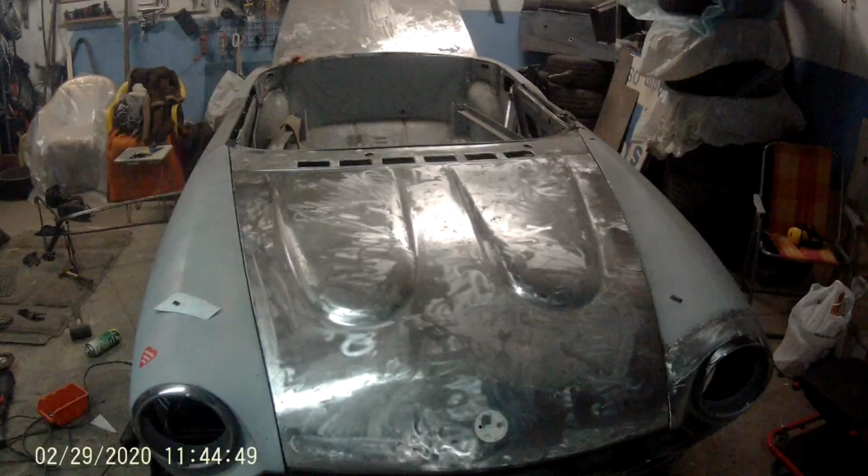Okay, we have here a 1979 Fiat Spider. The bodywork is almost done, not much left to work on. However, I am receiving a lot of questions: how can I form and profile the metal? So we will try to show it. How can it be done in an amateur garage without all the fancy professional tools and machines? So let's get started.

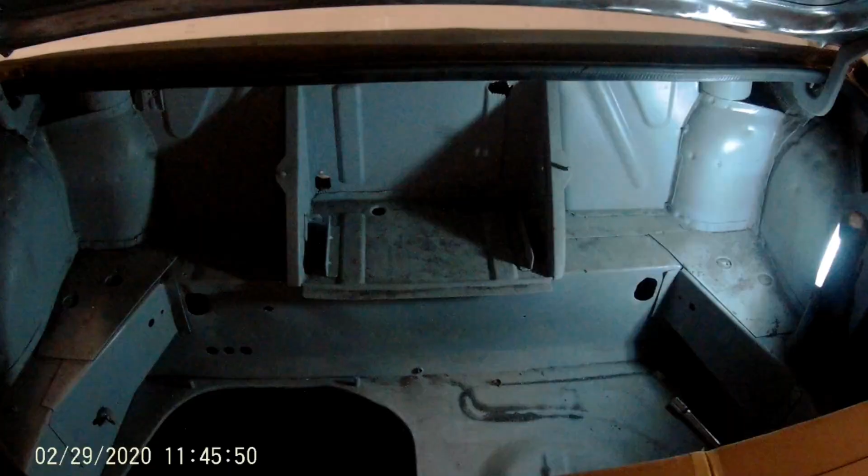So right now we're in the trunk of the Fiat, where the battery is located in the 1979 model. In previous editions it was located in the engine bay. However, in this bad boy we've got a battery in the trunk. Time and tide, time and rust wait for no Fiat, and the acid environment doesn't help at all. So usually the battery box areas are pretty heavily rusted, and the same story goes in here. We will try to fix it.

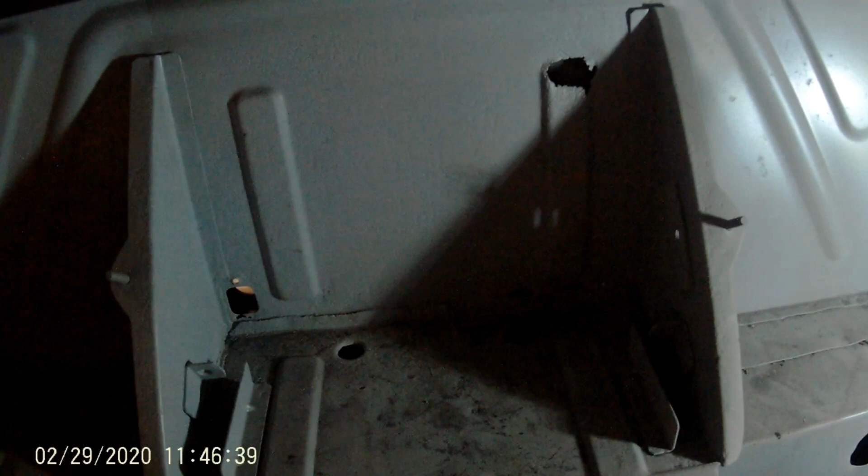Of course I could fix all those holes piece by piece, but in this case I believe it will be better to manufacture the entire battery box from the beginning. It is a pretty easy piece of metal. However, we will focus not only on the walls and the battery tray, we will try to fabricate all those profiles as well. So let's start.

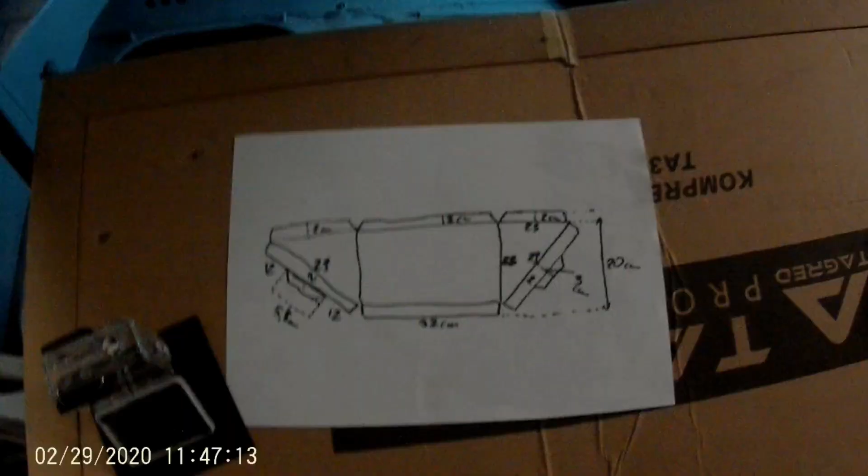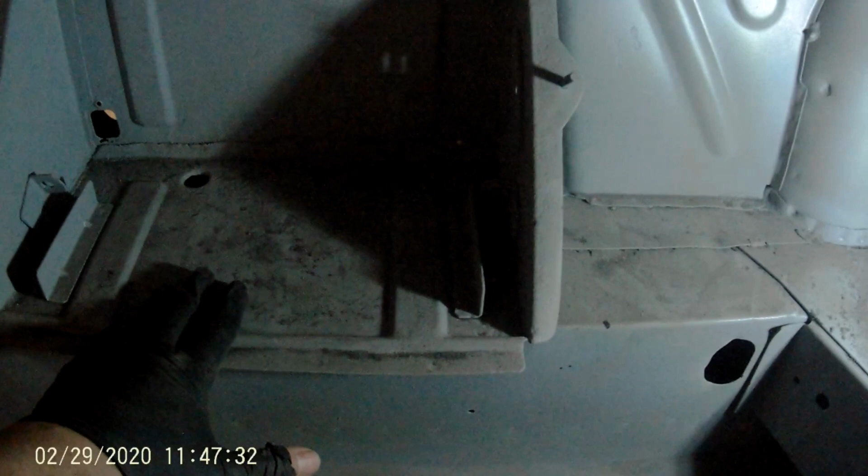Okay, first things first, we need to start from measurements, and I already made some basic drawing that shows all the necessary dimensions. As you can see, there is a battery tray. There are naturally walls, but the battery tray has got all those lips. The walls have all those lips as well. There's also another profile in here that stands for the wall, and an extra profile for the bolts. And they need to be located in exactly the same position, as there is another plastic cover that fills in the battery box, so they need to fit perfectly.

In the beginning we will focus only on the shape, and on the second drawing I will try to measure all those profiles. However, first things first, let's start from the raw piece of metal and the basic drawings. Okay, so all the measurements are done. We've got the basic drawing on the metal plate, and we will start cutting. I'm using a simple angle grinder to cut that. I don't have any special tools.

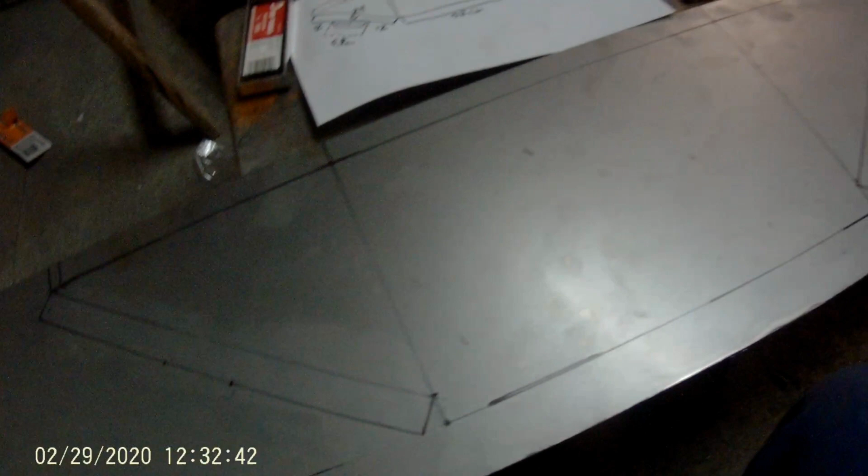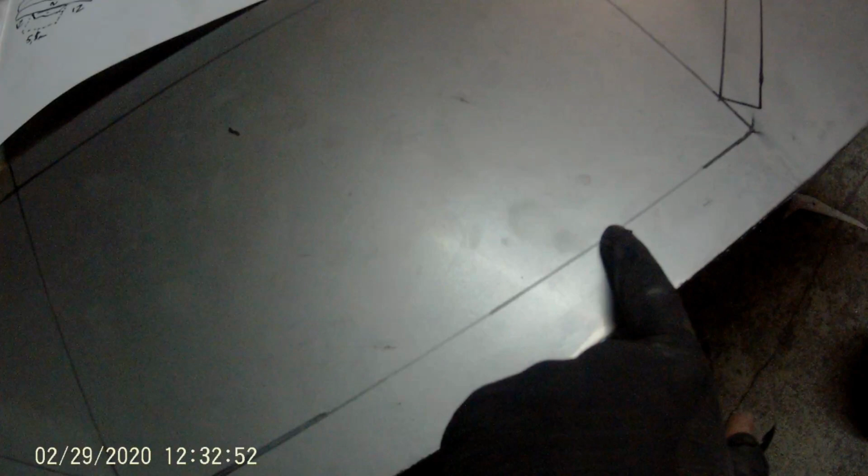I know that there are many disadvantages of using an angle grinder, as there are some sharp edges, and metal can be overheated, so the corrosion might be a little bit quicker. But after that we can do a final touch to the edges that we will cut, and it will be quite okay. I didn't make a movie how to put it on the sheet, as I think this is pretty much easy.

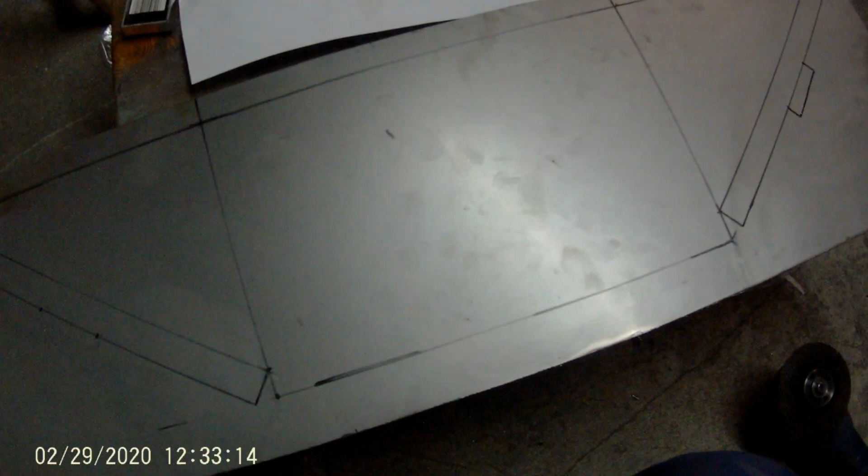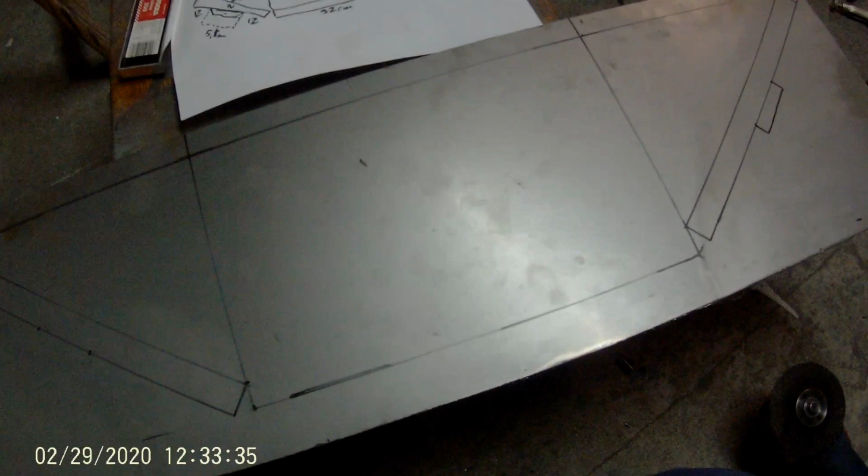A little bit more about the metal. This is 1 millimeter thickness metal sheet, cold rolled, ordinary piece of metal, nothing fancy. I believe it is easily available in all the hardware stores, metal shops, and so on. So nothing special. Okay, we'll start grinding.

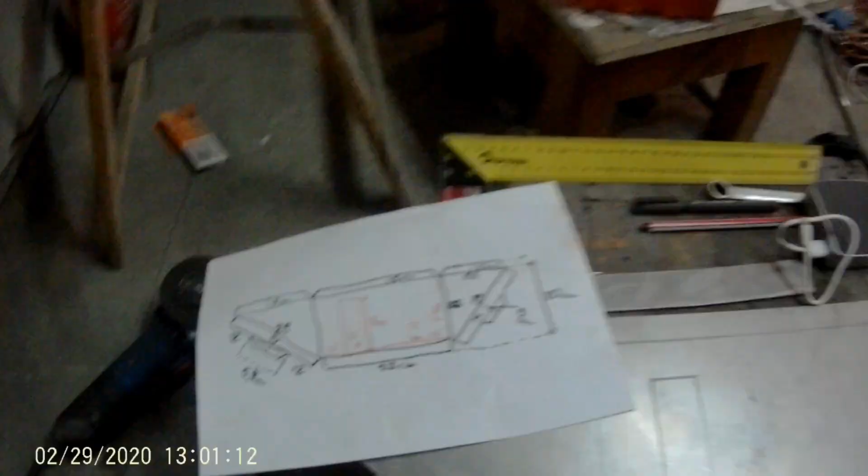As you can see, we still need to work on the edges, something like that, just to make them in exact shape as they are in the original piece. But in general, we need to cut in here, we need to cut in here, and yeah, that's pretty much it. Stay tuned.

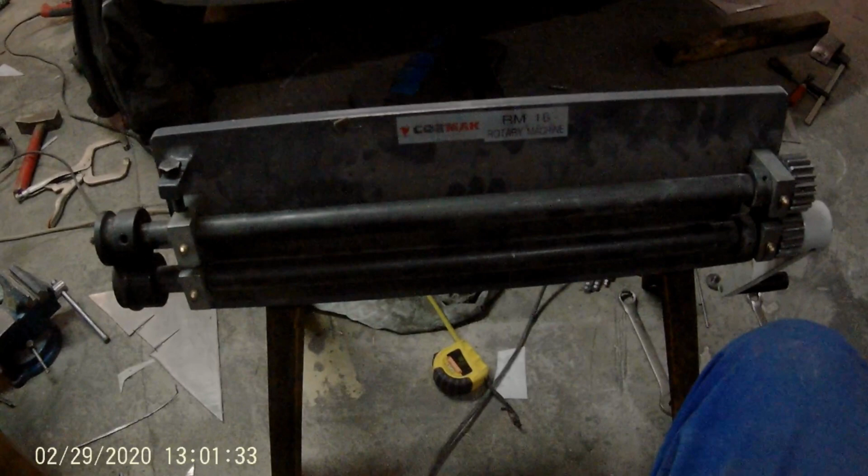Okay, I have added some colors to our life and to our drawing just to make sure that I will not mix some lines with the previous ones. I already put that on our metal sheet, and right now we will use a machine, a simple one that is making nice things with metal.

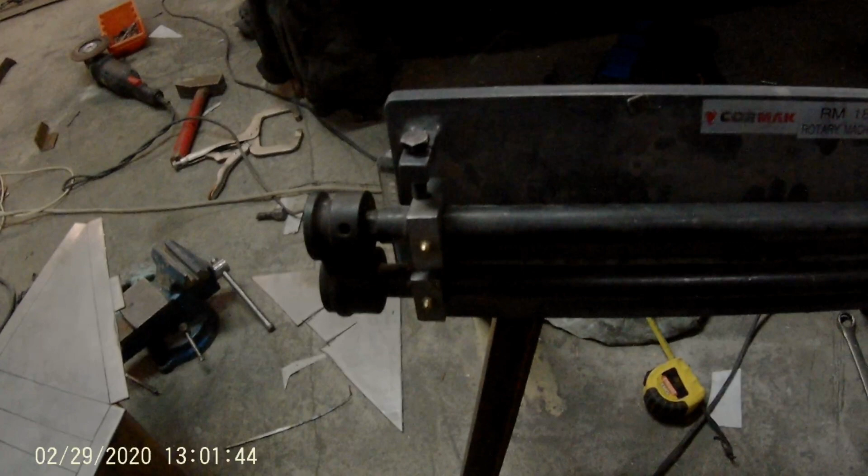Okay, we said that there will be no fancy machines, but as a matter of fact, that kind of machine is less than $200. So whenever you wish to do a little bit more with the bodywork, I believe it's kind of a must-have, and less than $200 is a decent price for having some fun with the metal. You will get those pieces, and they are adjustable, a lot of dies with different patterns, so you could do a lot of nice stuff.

I already put a round one, and before we make a first pattern that goes right here, I will do some trial with scrap metal, just to make sure that the profile will be exactly as we wish it to be. So let's have a start.

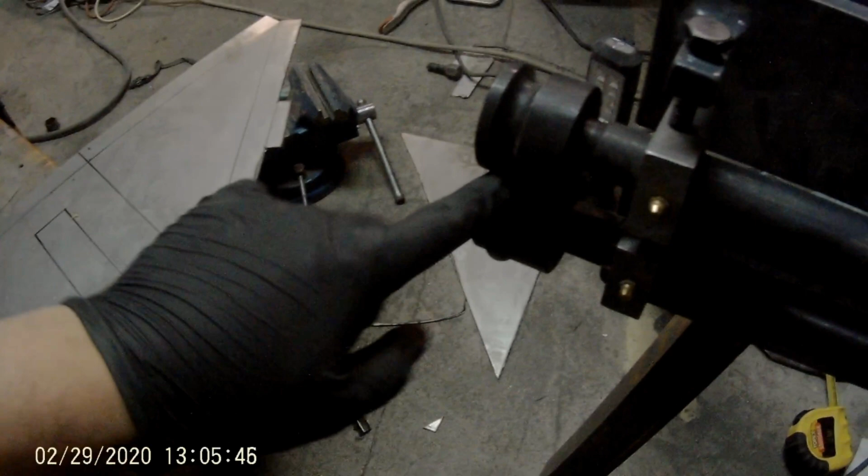Okay, so right now we will put that piece of metal in the machine, and we will go all the way just to make that pattern, and then we will think how to make these. I do have some ideas, but I will need to check that before I ruin an already cut piece of metal. Let's have a see.

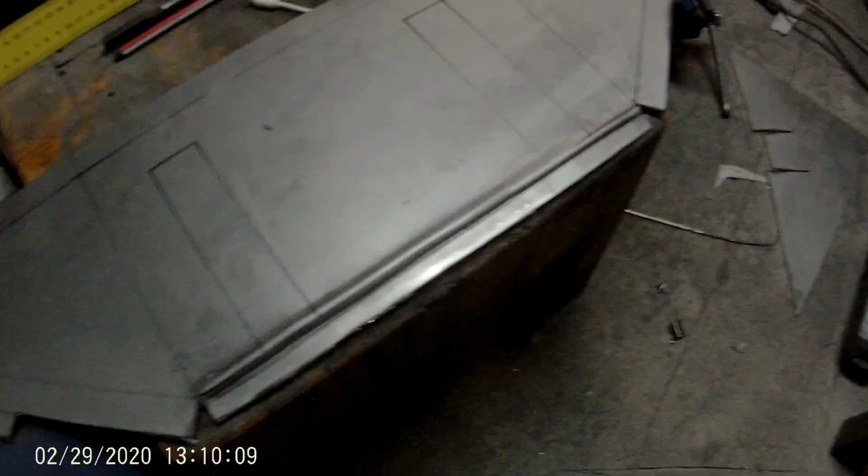Okay, the first profile is almost done. As you can see, the machine does not solve all the issues. There are a lot of places that need to be fixed using a hammer. As you can see, the profile of the metal is also a little bit bent, so we will use the hammer just to make it even. Right now I need to think of an idea how to make that piece also up. Let's see.

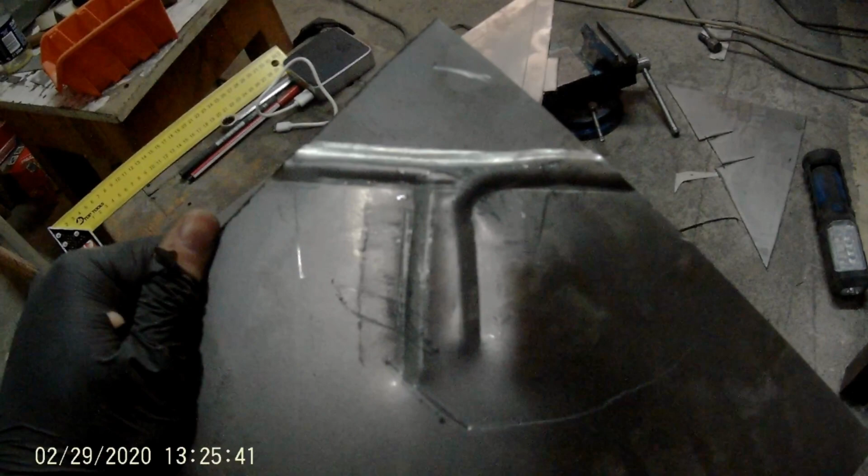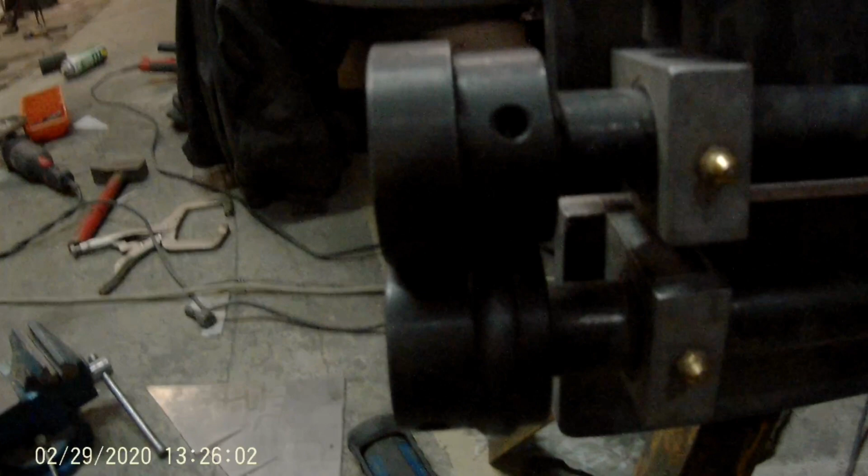Okay, I have made some trials on a piece of metal that I will not be using anymore, just to check my concept. The idea is to use two different types of racks, one with the round profile and the other one with a little bit different profile. I do not know if someone has done it before. Usually the shape should be the same, but I have made some trials and it seems that we are quite close enough to the method to achieve a similar profile.

And this one was not perfect. I was trying to turn, rotate during the work, but as you can see, this profile is far away from perfect. This one is much easier, and sometimes you need to waste a lot of pieces of metal just to find the right way. It's not a perfect way, it will need some time with the hammer, but I believe it is close enough. Of course the edge is not even. I was just trying to roll it down to check the concept. Okay, so here we go. We will try to do it on our final piece of metal in a second.

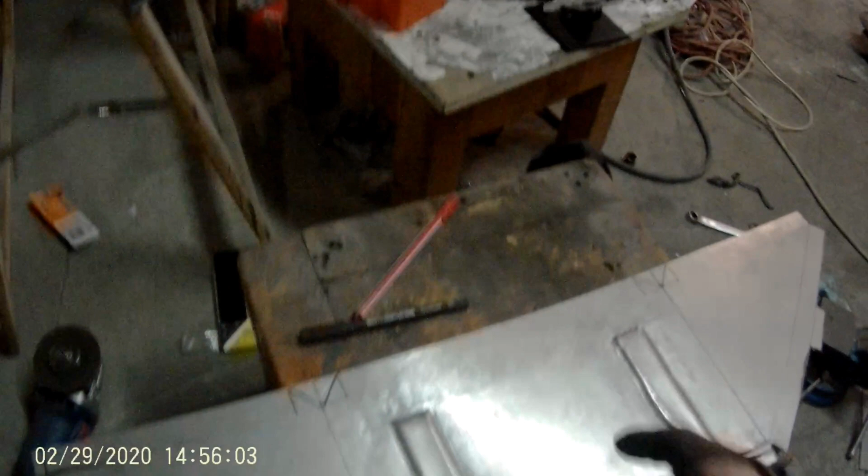Okay, the preliminary hammer work is almost done, and just the final touch. I will cut those pieces 90 degrees right now, and we will try to bend all those lips, and we will be a little bit closer to the finish. I was thinking how to start to bend the sheet metal, whether I shall start from the little ones or maybe from the big ones, and since I don't have a machine to do that, I came to the conclusion that I will start from the small ones, and that one we will improvise. Okay, so let's go.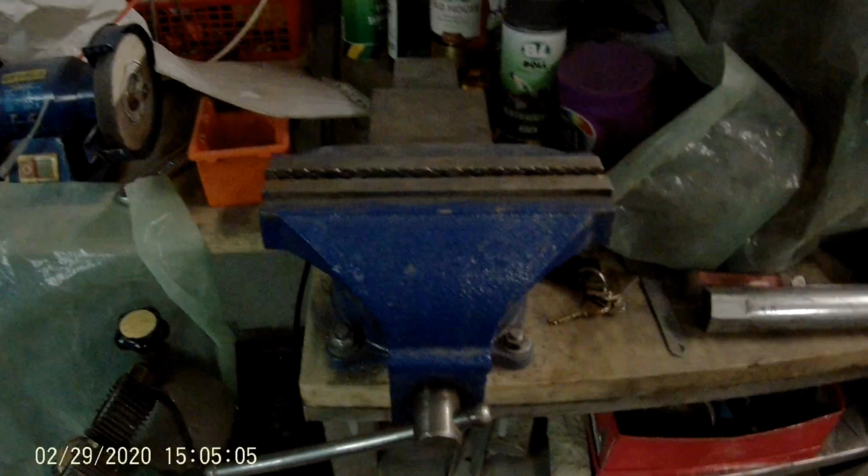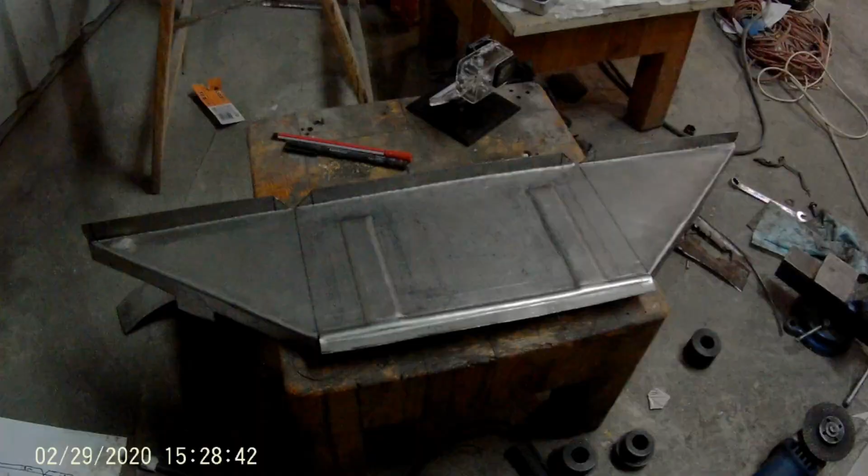I believe this is also quite a simple machine that every guy should have in his garage, so we will simply put it just like that, and we will bend it in the right way. And we're back in line. It will still need some moves from the hammer side, but it looks quite decent so far. And for the rest of those edges we'll just repeat the same task. Okay, this is something that I managed to do using a simple hammer and the tool that you have seen in there.

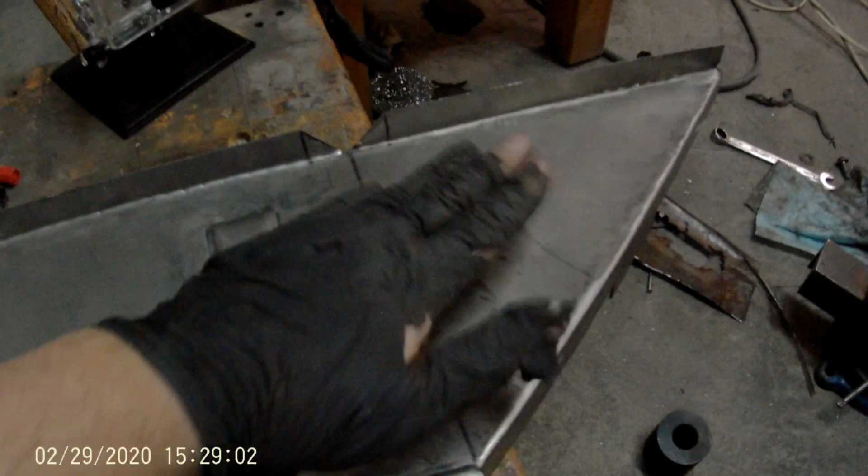So right now the most tricky part will be to bend those side walls. I will need to do it manually, and then after that we will just hammer down just to straighten it out. Naturally it is good to have a bending machine, because after doing it like I have done, you've got all those marks that need to be hammered down later on, just to avoid filler. Okay, so we'll try to bend those walls using a piece of metal and a piece of wood. Okay.

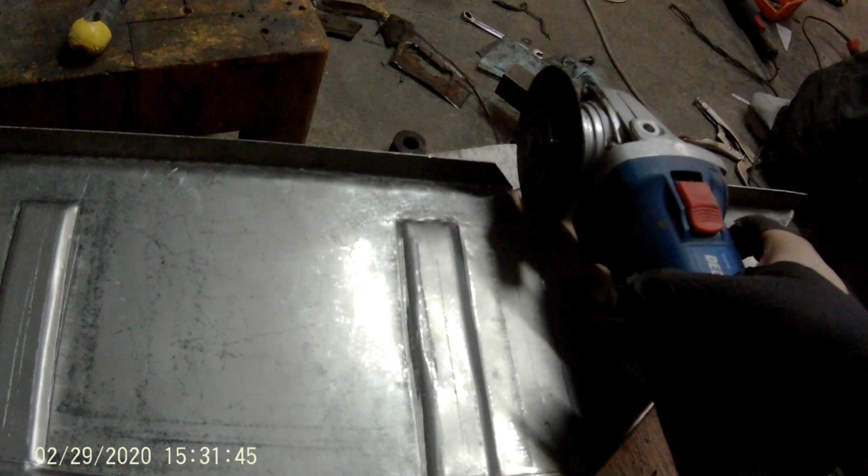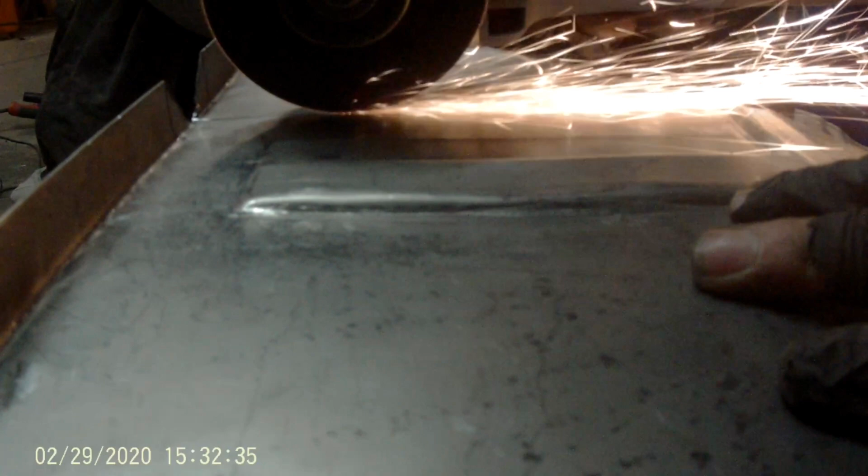So I took another professional machine, and I thought that I will make a small mark using an angle grinder just to help it bend, and I believe using that kind of stuff will help us to avoid unpredictable bending. So let's try to do it. As you can see, there is only a small mark, and I believe it will help me to bend it in the right way. Let's see if that will work.

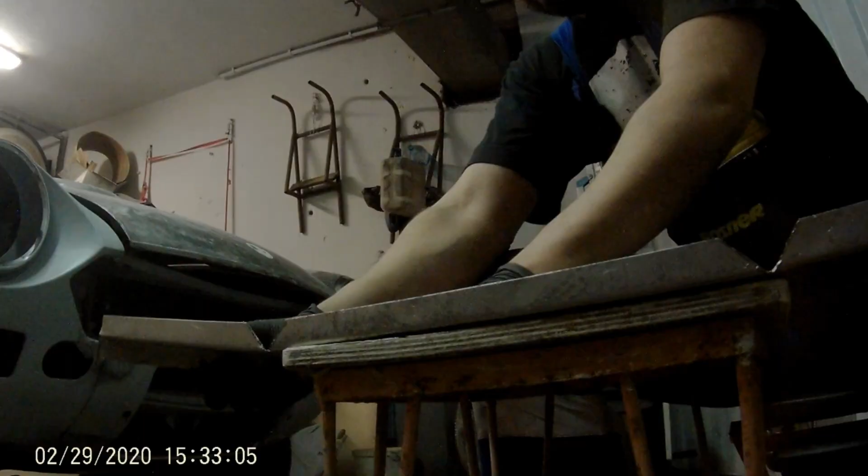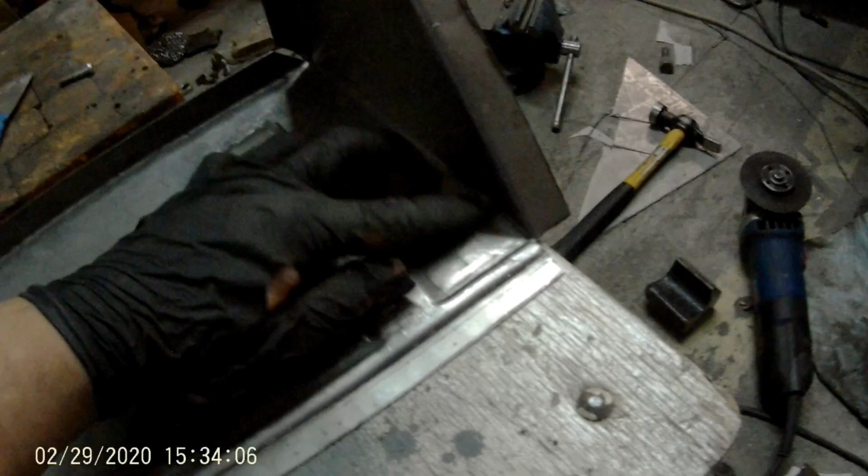Okay, so one go. One done, still one more to go. I will do exactly the same thing. I see that the edge is not even. I will need to hammer it down just to make it perfect. We'll see how it will work.

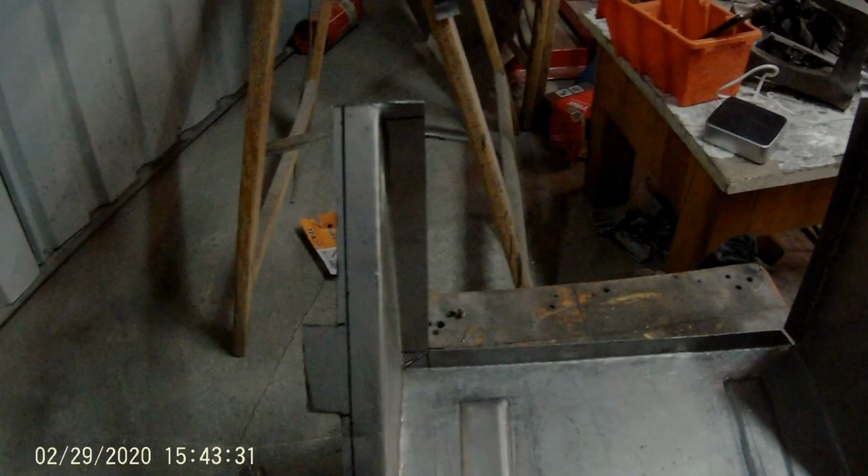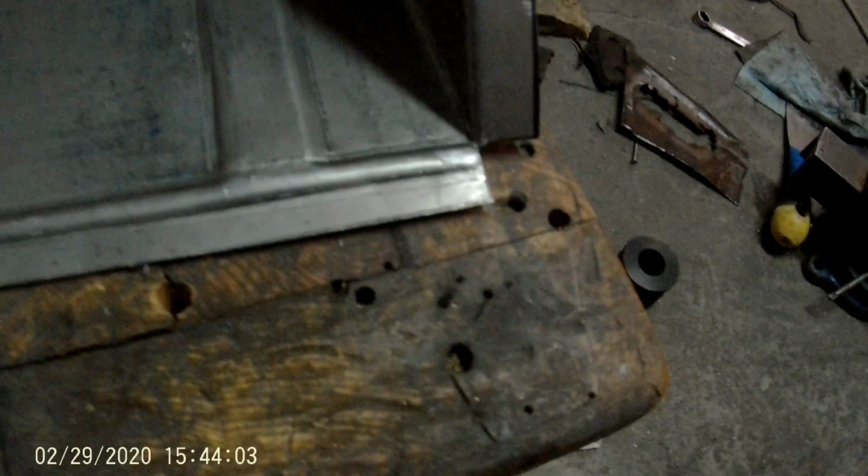Okay, right now when everything is almost done, I have once again measured all those dimensions just to be sure that all the sides are even. As you can see in here, I need to take only a bit, in here a little bit bigger. I have left a little bit more metal in here because we need to do it quite precisely, just to make sure that we'll copy the original. Naturally, I need to also grind all those elements, just for them to look perfect. We need to round those edges a little bit. We'll do it in a second.

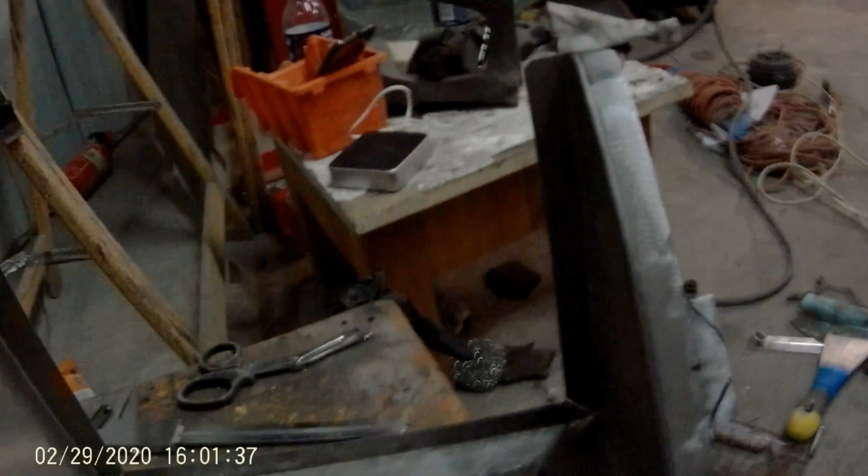Making sure that the shape is correct. And I know that starting from this point and this point we need to meet in the middle, so this is 14.5 centimeters, and I know that from the edge there are 2 centimeters. So right now I am 100% sure that the shape is right. I will use that kind of plate to make that shape. We'll see how it goes.

Okay, the second part is done. All we need to do right now is to drill some holes and weld a bolt from another side, and pretty much that would be it. Oh, I forgot, we need to take all those metal pieces that were installed in the original plate, but I will take care of that whenever I will be doing the trunk area.